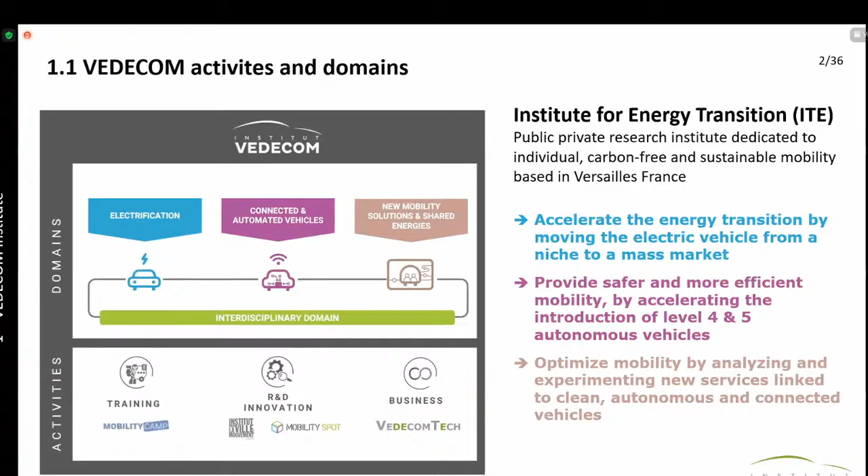So our partners: as I said, we are a private-public partnership. Sorry, this is a pretty crowded slide, but what you need to remember is that we have our founding members, which are industry and academia. We are funded also by the French government and the European Commission for some of our projects, and we have around 50 to 60 private sector members from automotive, transport, telecommunication, road infrastructure, aerospace, digital services, insurance, along with academia and the local authorities.

In France, local authorities have a very big say in heavy infrastructure, and having them around the table is very important. So we are organized, as I said, in 3 main departments. Each department has several research projects. In my department, we focus on electrification in a large scope, not only mobility, but also aerospace, I would say aeronautics, so the electrification of airplanes, for instance.

And we have 5 main objectives. The first objective is very automotive oriented: to reduce the cost of e-drivetrains through removing rare earth materials, magnets, and simplifying production of mainly the electrical machine and the power electronics. We also work on increasing the performance of e-drivetrains.

So here we develop technologies around power electronic components. So everything that is new in the semiconductor industry, like silicon carbide and gallium nitride (GaN) components, and all the challenges they bring in order to have more compact and more powerful power electronics. We also, and this is the main topic I will be presenting, mitigate EV range limitation through wireless dynamic charging.

We also study, for wired charging, the integration between the grid and the vehicle. If you want to do some kind of smart charging or bi-directional charging with the grid, you have to have a vehicle that can connect and communicate with the grid in order to know whenever it has a window to charge or should be giving energy back to the grid. So we also study this topic.

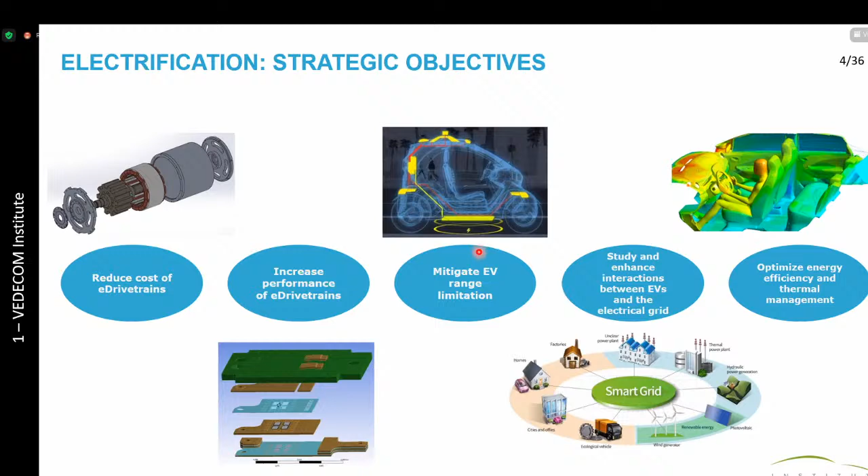So these are the 5 main objectives, and today we will be focusing on mitigating the range limitation of electric vehicles. This project is called VERA, for electric vehicle without range limitation. Some context: I think at the beginning of this day, you had much of this context, the economic and especially the climatic impact of electrifying transportation systems.

So we are confident that EVs are one of the main players in the energy transition. And in France, up to recently, we had very big incentives for people to buy electric vehicles. And we are having a very big deployment of charging points, with a roadmap of 7 million charging points in 2030. The European Union and the government are heavily subsidizing the deployment of EVs. And if you want to deploy EVs, you have to have the infrastructure that is able to charge them.

So, as I said earlier, we look at the charging infrastructure, but we also have a somewhat longer vision about how EVs can and should be charged. You have the range problem. In order to address this, you have the recharge infrastructure of EVs, which we call in French IRVE. And the idea here is to say, okay, we can have lots of high power charging in order to reduce the charge time of an electric vehicle.

But is it the best user experience, and the best way, to be stopping in order to recharge? Wouldn't it be possible to mutualize the infrastructure? Because when you have a charger, only one car can charge. Is it possible to charge several cars at the same time without having several chargers? Would it also be possible to reduce the battery size of the vehicle? Because if we can charge while we are moving, we can have less battery weight and be more energy efficient.

And of course, this will have a very big impact on the user experience and the habits of users, especially as we can already see it in tramways, where, for instance, some cities don't allow for cables or visual pollution in historic areas of the city center. So this is why we started investigating wireless charging since 2014.

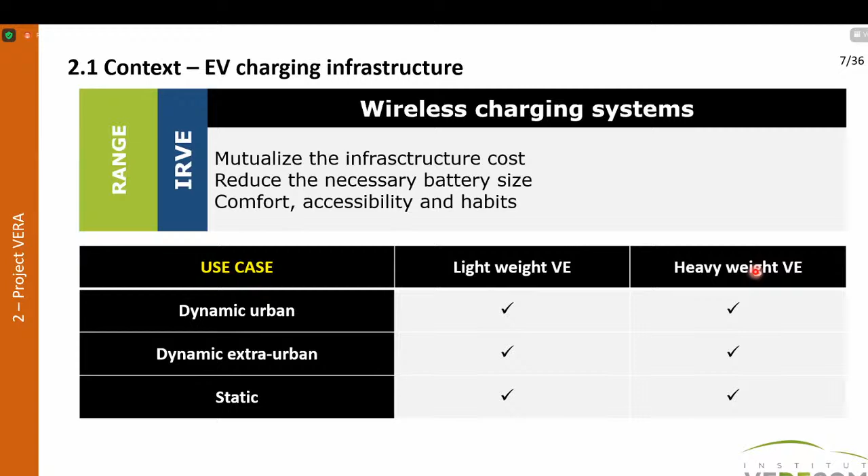So the question will be, well, how does it work, wireless charging? It's not very complicated from an electrical and electromagnetic standpoint. Conceptually, it's quite easy. So you have a track, and on the track you have coils that are embedded in the road, and at the car side you have a receiver coil. So it's the same setup that you would have on your charging pad and your smartphone, but a bit more power and a bit heavier.

And so you will go from the power grid to an AC-DC converter. So you have to filter out everything that we will be doing on the high frequency side of the circuit. Then once you go to DC, you will have a second stage of DC to AC conversion, but this AC will be around 85 to 90 kilohertz in order to have the system radiate magnetic field, electromagnetic field from one coil to another without having any connection between them.

So you have the ground coil, okay? So these are the track components. And on the EV side, you have the EV coil with the charger, and that is connected to the battery. And the power transfer is done between these two coils through the air. Okay? So this is, for instance, the case for a car with a single coil on it and several coils that are on the track.

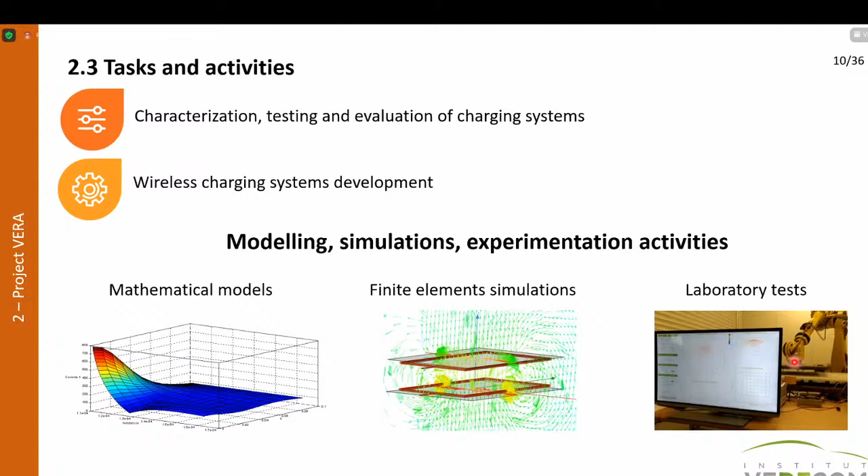So some of our work is based on mathematical modeling. So you have lots of modeling, simulation, 1D, 3D simulation, but also experimentation activities in the lab. So you can see here we have a robot with simulated tracks, so several coils on the table and one coil that simulates the car, and we can characterize at each point and measure different characteristics, as you can see in the video here. So you have the robot that is moving, and at each point we are using some magnetic field probes in order to characterize the radiating magnetic field, because we have to also be very compliant with safety regulation.

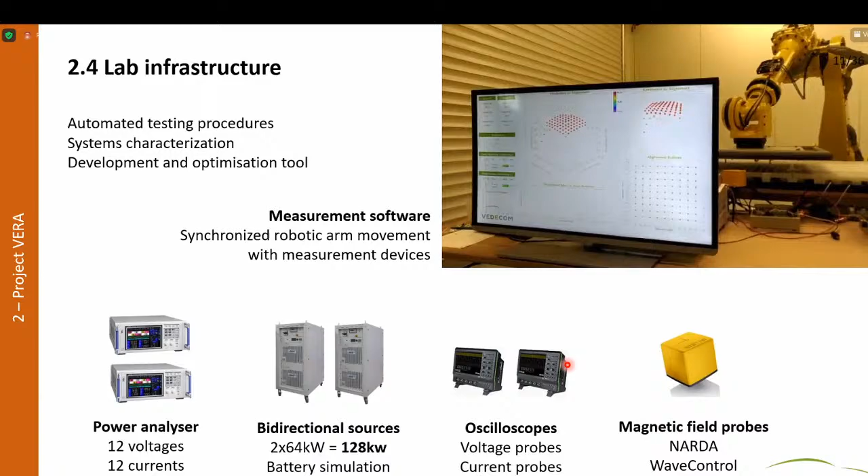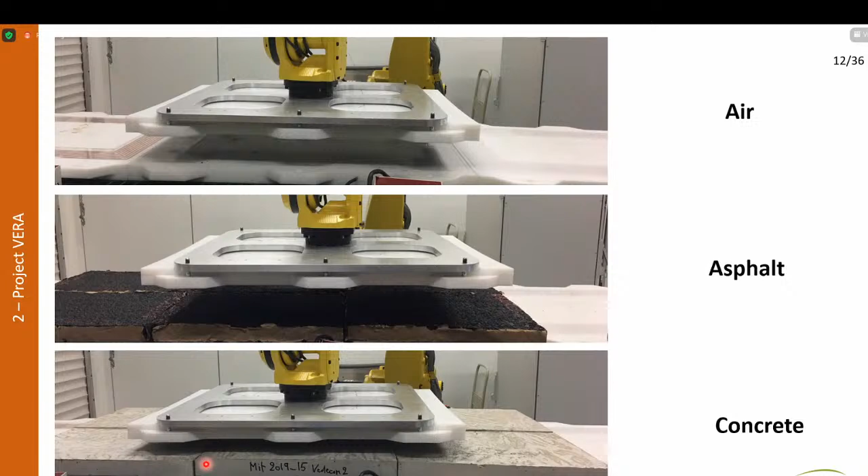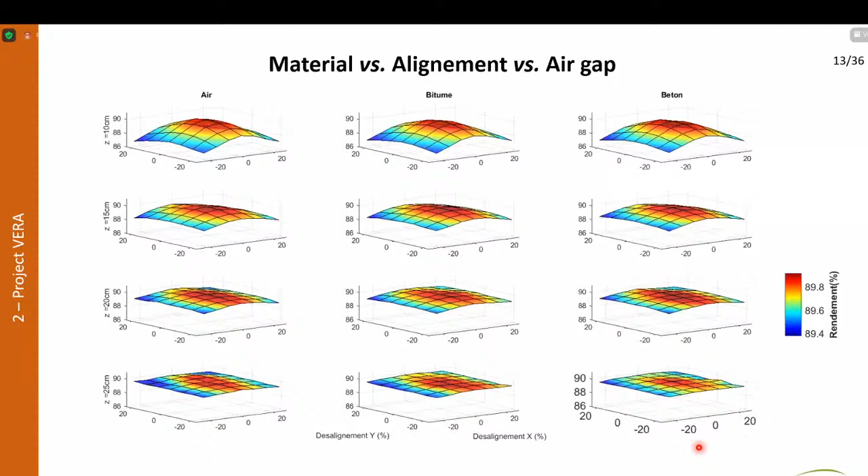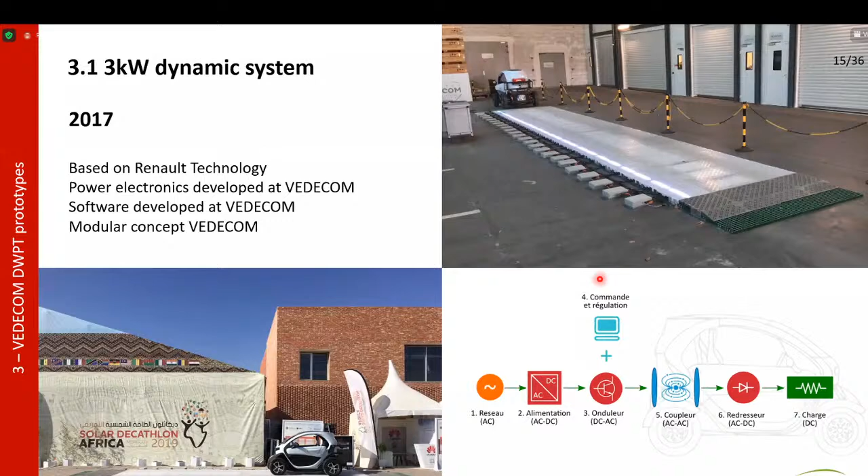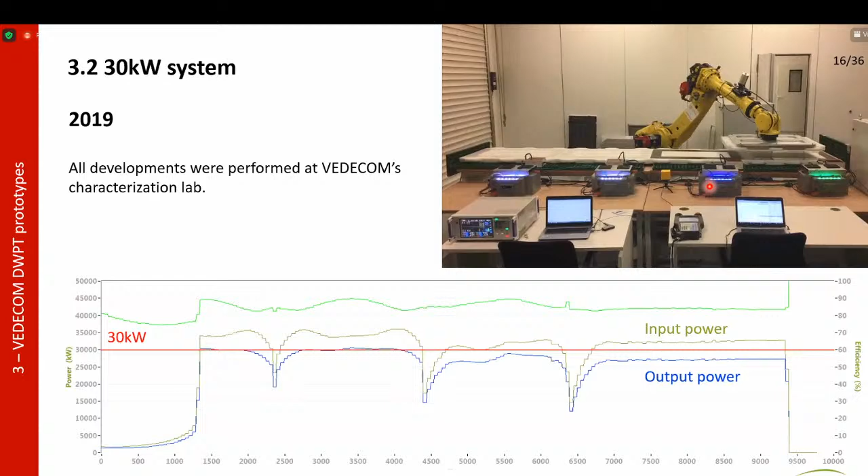So you can see here, the most interesting thing is the efficiency, because we managed to run on efficiencies that can attain 90%. And this was one of the very big challenges at this stage of the project. So the idea is to go and install these in the tracks.

So we've already had, as I told you earlier, a very big European project from 2014 to 2017, which was called Fabric, in which we installed a system. It was not our system, it was the Qualcomm system on a 100-meter long track, where we demonstrated the power transfer at 110 kilometers per hour for 20 kilowatts. At the time, there was also very big research around vehicle to infrastructure communication, because the track needs to know every point where the vehicle is in order to activate or deactivate the coils of the track. And here we managed to showcase the feasibility of the technology.